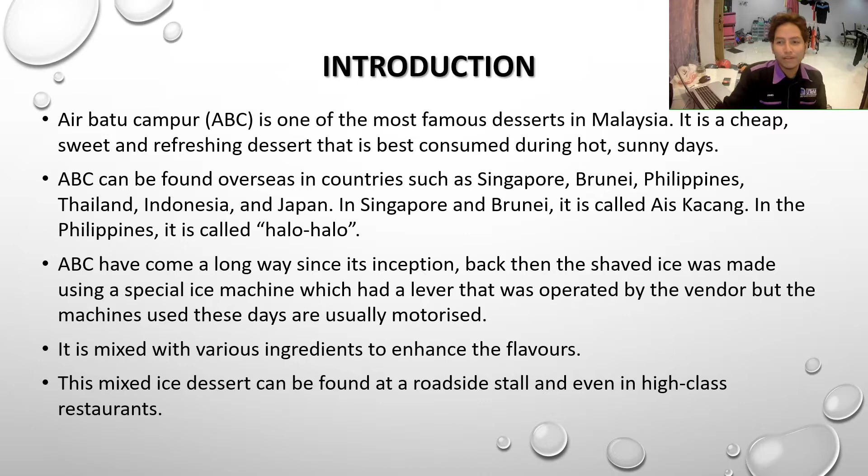ABC has come a long way since its inception. Back then, the shaved ice was made using a special ice machine which had a lever that was operated by the vendor, but the machines used these days are usually motorized.

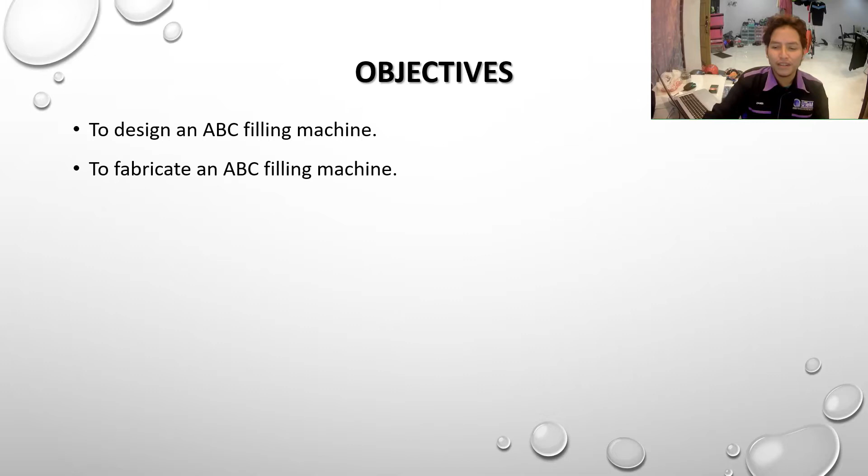For the objective of this project, it is to design an ABC filling machine and to fabricate an ABC filling machine. For the scope of study, first is to design the ABC filling machine using computer aided design, which is AutoCAD and also Inventor. The second is to fabricate the ABC filling machine using suitable materials such as stainless steel, food grade stainless steel 430. The last one is using a pneumatic system for the machine to work.

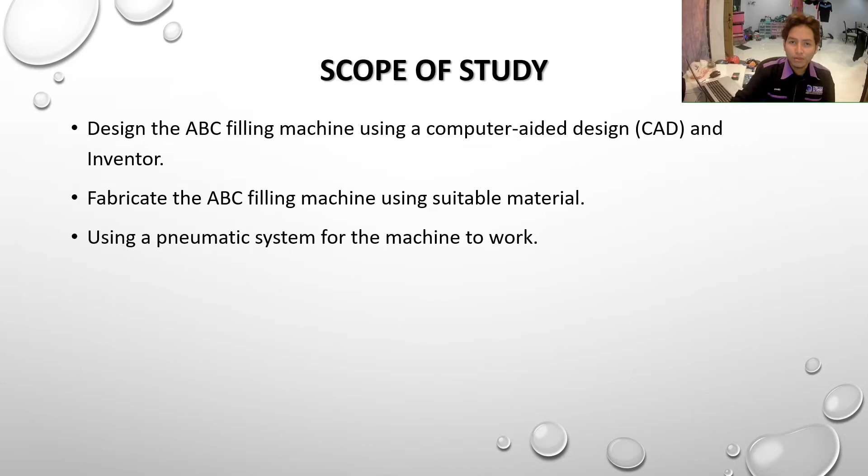For the problem statement, ABC has only been made by one person and this is done manually by hand. This slows down the task for the person to make one bowl of ABC because the person needs to crush the ice and then continue filling toppings.

The placement of the cans of ingredients and toppings near the ice crusher creates a mess for the process, and to fill the ice with the toppings the person needs to scoop up the toppings with a spoon, which can create a mess in the workplace.

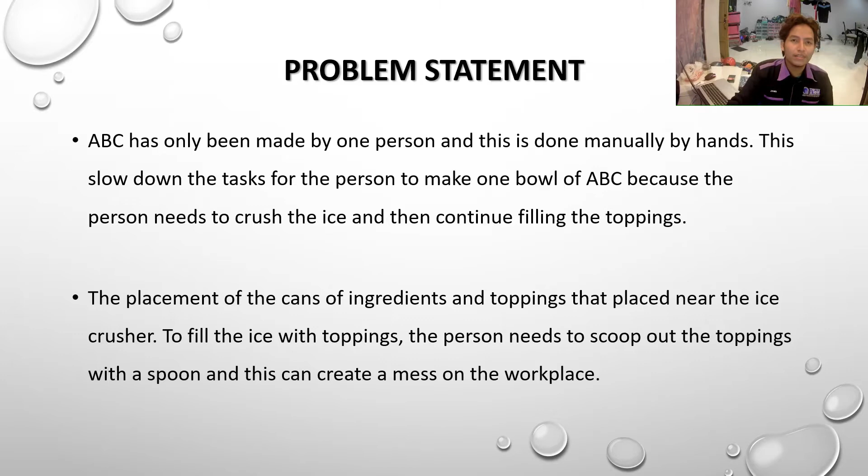For literature review, I'll tell you a little bit from Solanki and Raj 2020 on the topic of automated liquid filling machine. Its findings say that volume setting from one size to another will be done by changing command to the gear pump. Once it is calibrated, volume setting will be done in seconds, so it will give more production and save a lot of manpower.

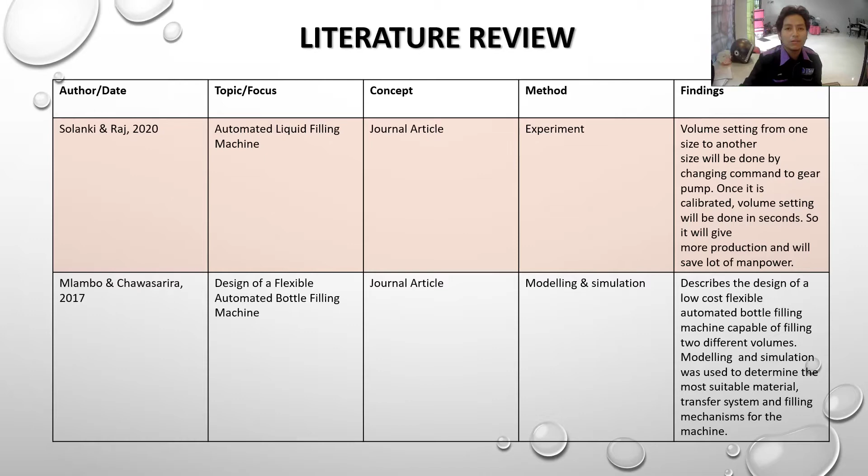From Mlambo and Chawasarira 2017 on the topic of design of a flexible automated bottle filling machine, they describe the design of a low-cost, flexible, automated bottle filling machine capable of filling two different volumes.

For this next slide, I compare three different types of machines: overflow filling machine, time gravity filling machine, and manual operation. The advantages are: fully automatic and accurate measurement for container filling for the overflow machine; economical and suitable for corrosive chemical filling for the time gravity filling machine; and low cost with no electric current involved for manual operation.

The disadvantages: the overflow filling machine has high cost and requires a big workspace. The time gravity filling machine requires fluid path and nozzle changes for different types of fluid, and is high cost. For manual operation, it may have inaccurate measurement and requires more workers to get the work done.

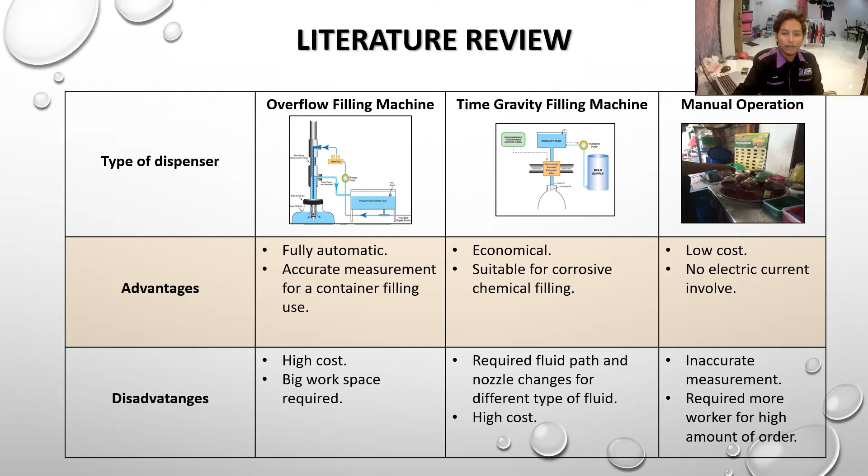For methodology, this is my flow chart for the process of the project. First is start, then briefing about the project in detail, which is meeting with my supervisor to get his opinion on this project. Then we move on to the project design, which is using AutoCAD or Inventor to generate the 3D and 2D diagrams, then go to mechanical and electrical parts, which is getting the parts for my project.

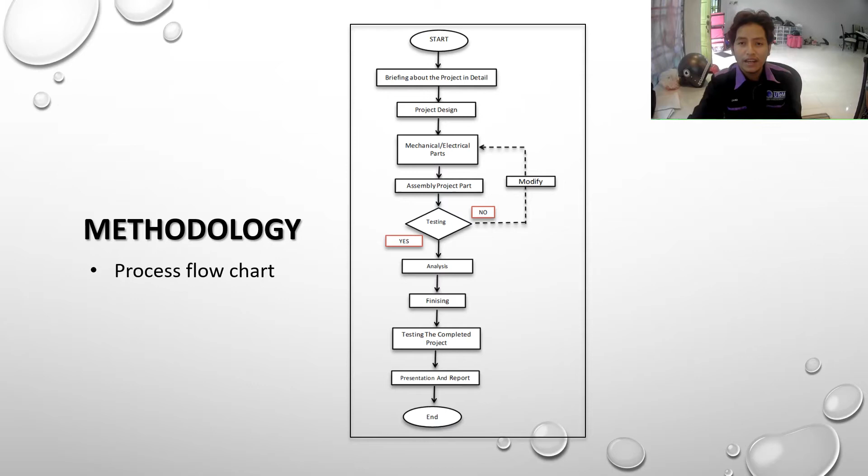Next is assembly of project parts, then testing. If the testing is a yes, then we continue to analysis, finishing testing the completed project, presentation and report, and then the end. If the testing is not working, then I have to modify back the mechanical and electrical parts and start from there.

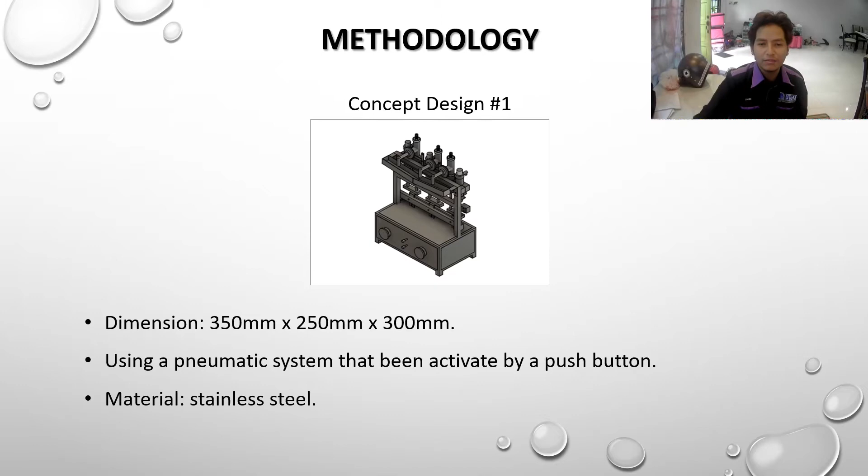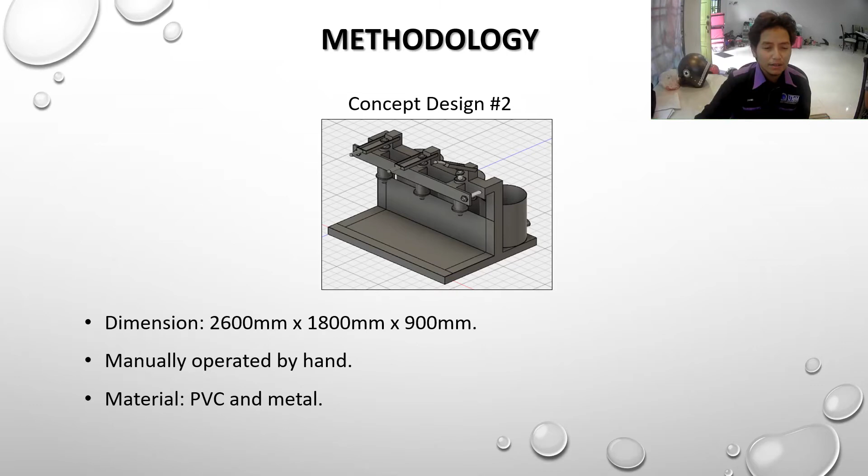The second concept design has dimensions of 2,600 by 1,800 by 900. It is manually operated by hand, and the material used for this concept design number 2 is PVC and metal.

For this, figure out the process of the conceptual machine. First one, the push button.

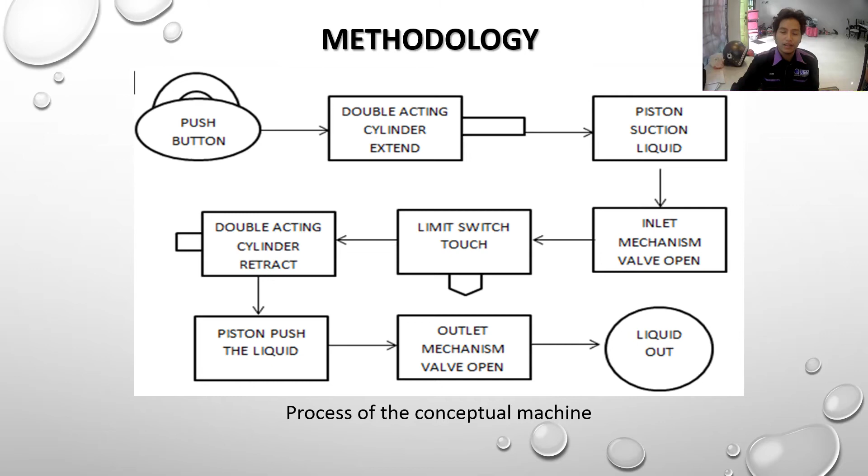When we push the push button, the double acting cylinder will extend, and the piston will suck the liquid from the container into the inlet mechanism, and the inlet mechanism valve opens through the limit switch touch. Then the other two double acting cylinders will retract, and the piston will push out the liquid into the outlet mechanism, the valve opens, and then the liquid will come out into the cup of the shaved ice.

And this is the conceptual project pneumatic circuit. This is the compressor. When the compressor gives out compressed air to the circuit, the push button will go to this mechanism valve.

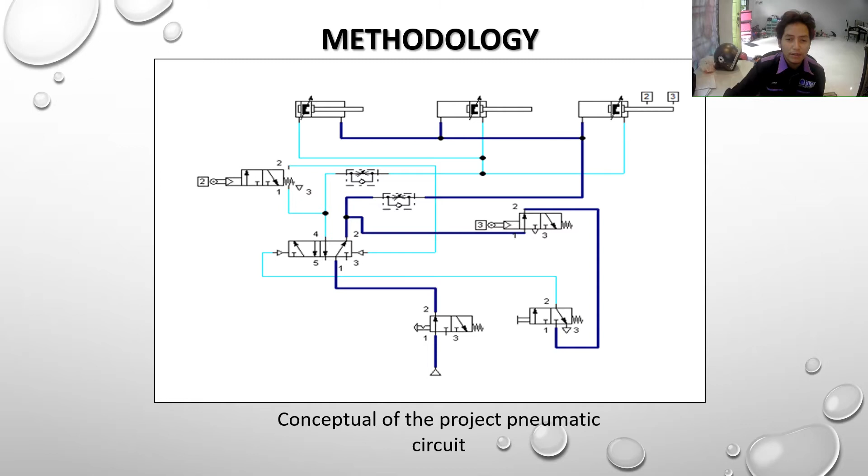This push button triggers two mechanism valves to touch with one of the double acting cylinders, and the other two double acting cylinders will retract, and it will continue over and over again until we stop the compressor's source of air.

And this is the result of the 3D design, which I used Inventor to generate this drawing.

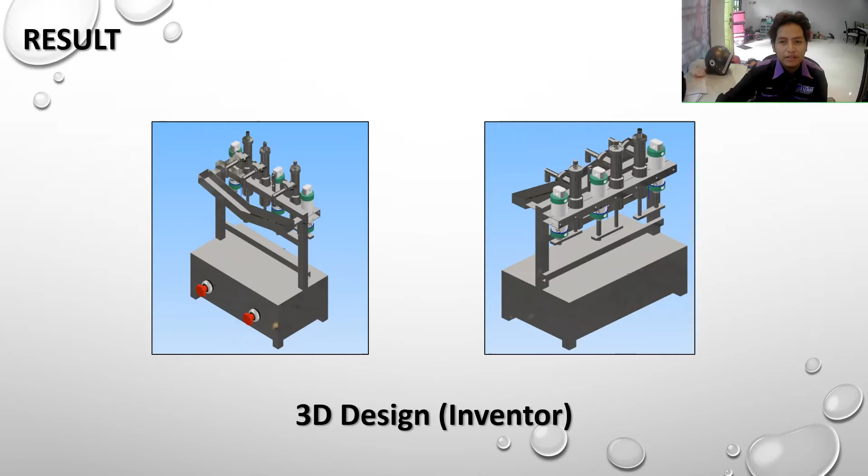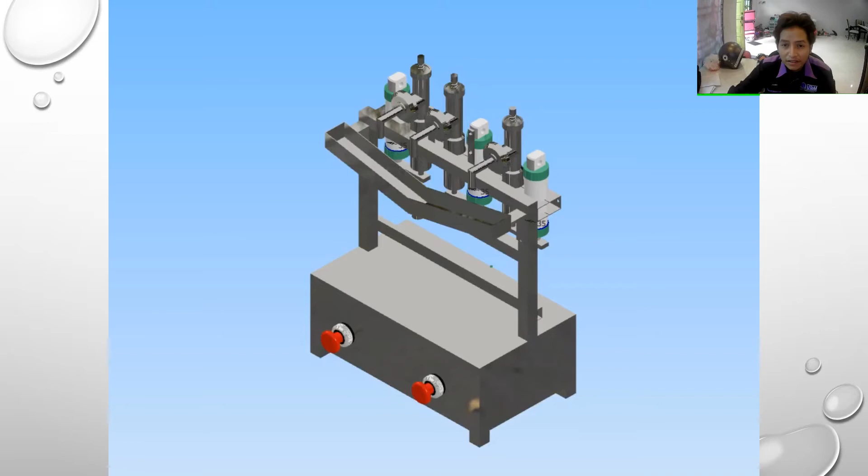And here is the flow of the process, the procedure. As you can see, as we push the push button, the cylinders will extend. Both two cylinders will extend, and one will retract, and it will go on and on until we stop the push.

And this is the video process of the ABC filling machine.

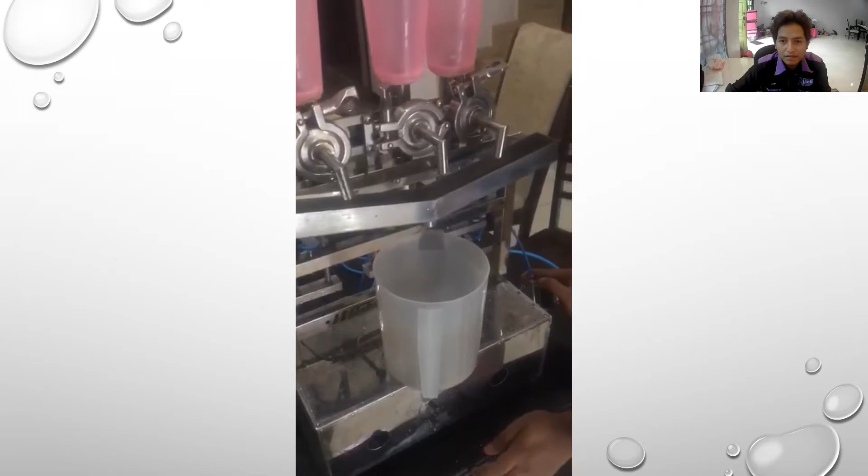As you can see here, when the cylinder is extended, it touches this mechanism valve, and then the mechanism valve will extend these two cylinders.

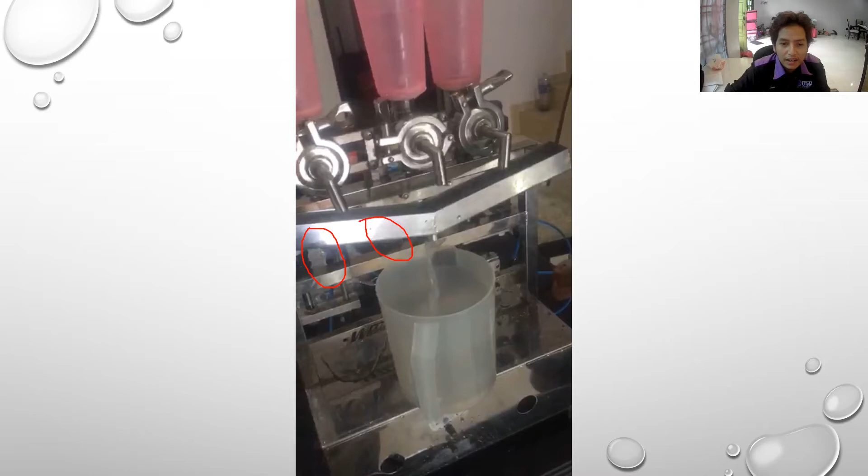Causing an automatic retraction for this cylinder to go up and touch back the mechanism valve over here, and it causes a flow of liquid filling into this filling tub.

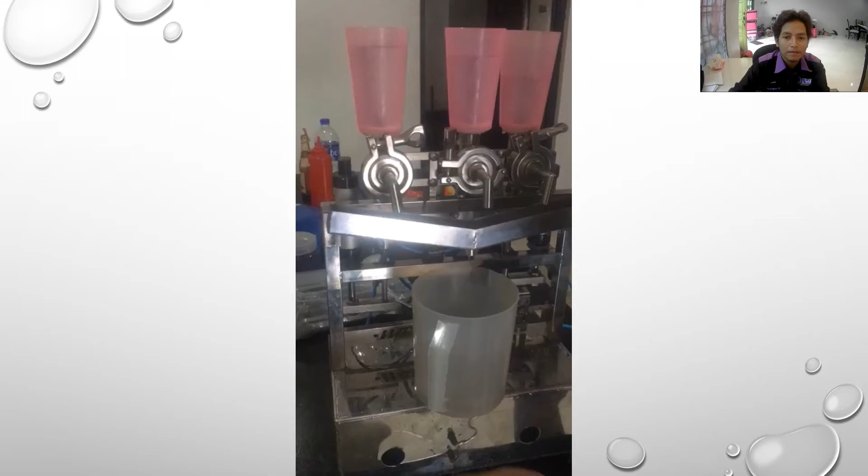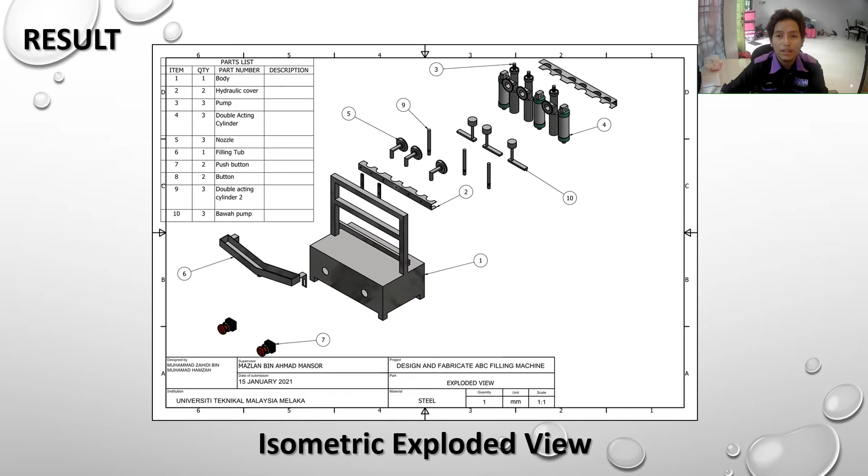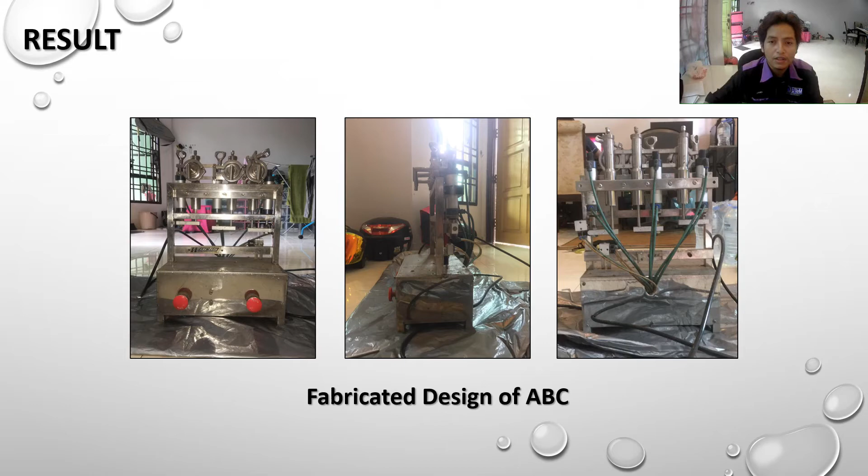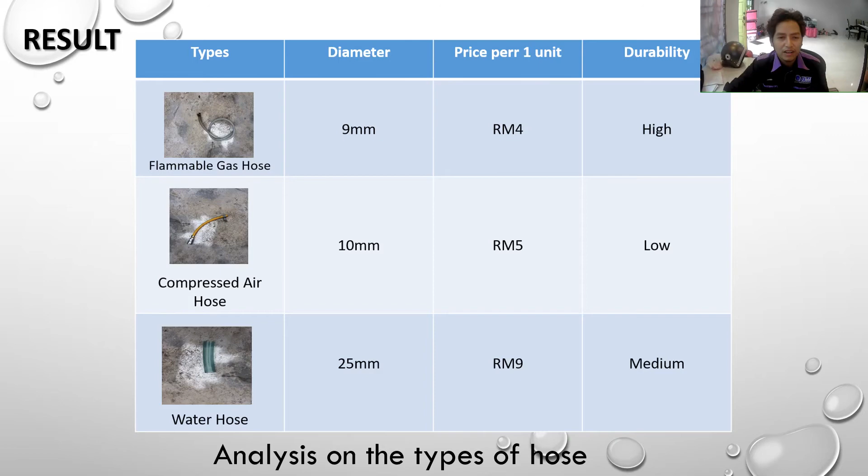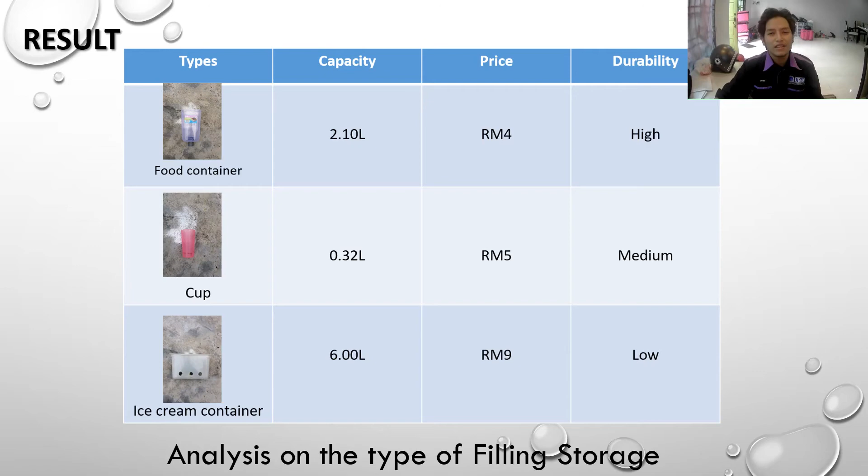For the analysis on the type of filling storage, I analyzed between three options: food container, cup, and ice cream container. Its capacity is 2.1 liters, 0.32 liters, and 6 liters respectively.

And these three have different durability also. For food container, it is high. For cup, it is medium. For ice cream container, it is low.

So I conclude that I can use these three different filling storages for different purposes. If I want to make it small and light, I can use this cup. If I want to use it for a longer event, I can use the food container. If I want an even longer event, I can use an ice cream container.

But mostly I will use the cup because this cup has been modified to fit the top of the suction pump.

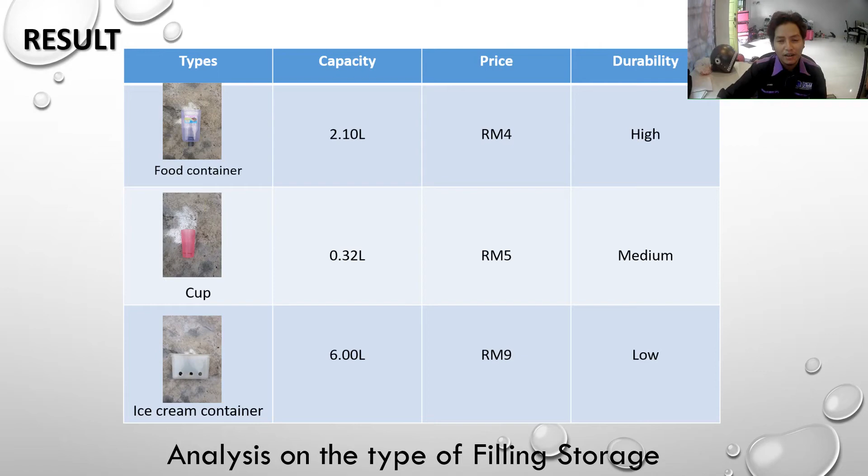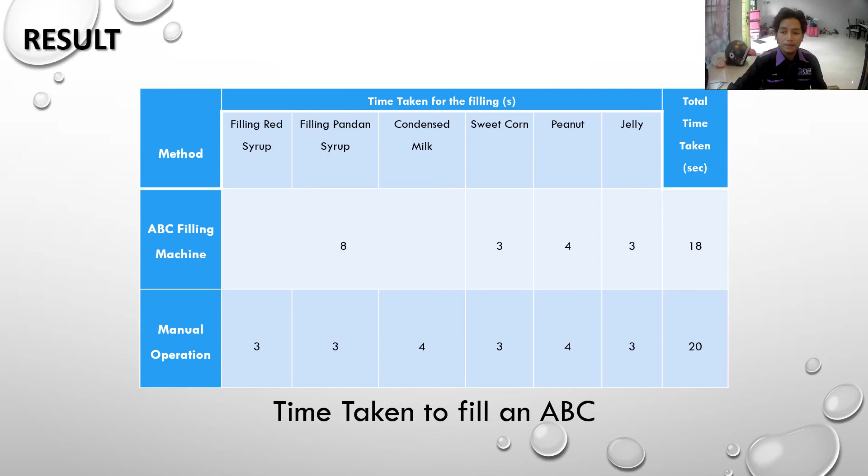For this, the volume of each filling: the scale is low, moderate, high, and the volume of filling is different, taking pandan syrup, red syrup, and condensed milk. For each different state, at low, the pandan syrup gets a volume of 3.33.

The red syrup gets 3.66, and condensed milk gets 13.33. For moderate, it is 10, 23.33, and 23.33 for condensed milk and red syrup, it is the same. And for high, it is 29.33, 33.66, and 38.66. This is the volume of each filling, that if the filling is put on top of the suction pump, it will get this volume.

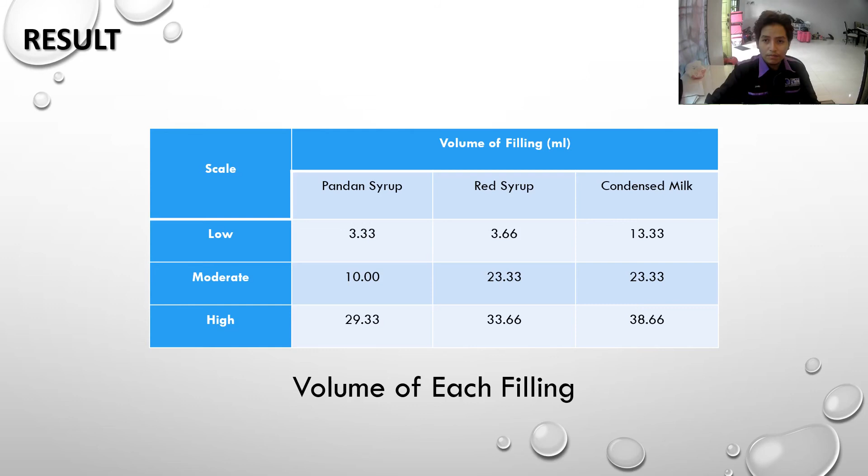For this slide, this is the estimated total cost for this project. For the components, I am using roller lever valve, double acting cylinder, pipe T with clamp, push button, 5/2 way directional control valve, stainless steel which is food grade, the tank which is the food container, the filling container, the hose, the screw, the oil seal, mechanism valve, and it totals 2301.06.

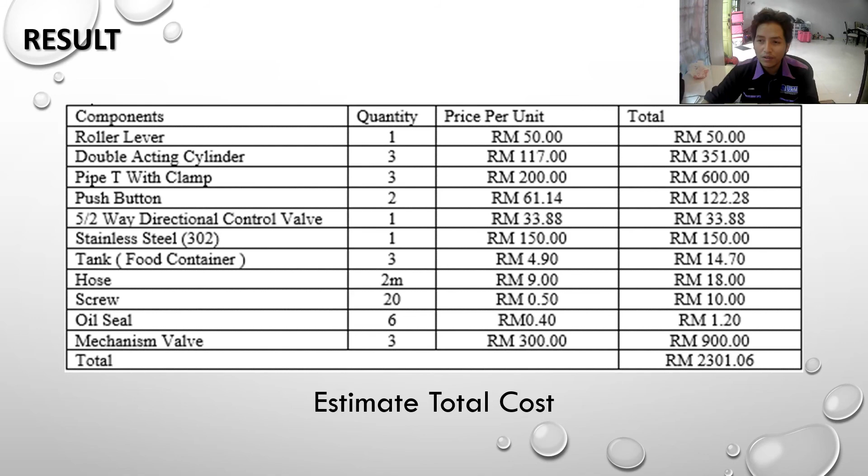For discussion, although many failings were identified during the process of making the machine, our objective for this project is successfully accomplished. Also, this project is successfully built within the scope of research as to narrow down the method to design and fabricate the machine. This helps to aim for the best result for future researchers.

Plus, it can help the trader to reduce work wage costs, as the economic situation at this time is in bad condition, such as this COVID-19 situation. Many workers lose their job, and then they had to start up their own business, and the price of the raw material to get is a little bit overpriced.

Apart from that, the filling is interchangeable with other filling, which can increase the use of this filling machine. This final project, we hope that it can be benefited completely, accepted and used, and suit the technological development in this age, and results from this project can be used by all consumers.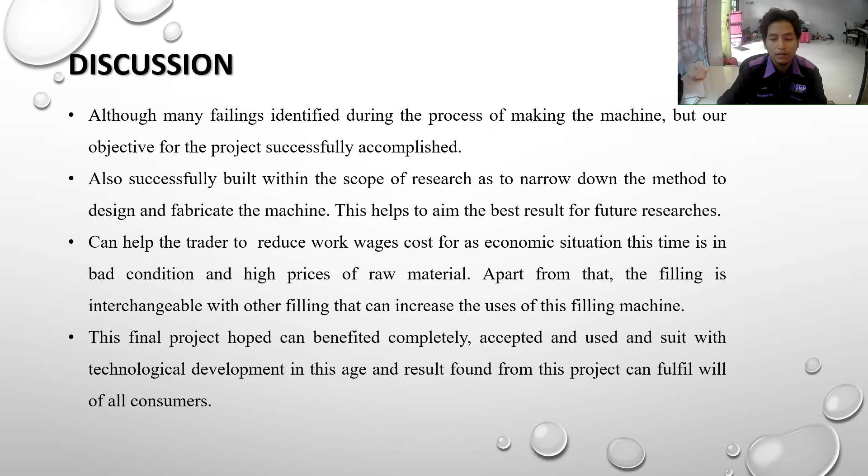In general sense, the process of filling using the pneumatic system was studied to make this ABC filling machine work. In this study, there are many ways of filling and many items were used as a medium of filling. This type of filling will be determined by the medium of filling and the scale of filling, such as industrial scale. Filling of sensitive medium also determines the type of filling.

As an example, the filling of an ice cream must be in controlled temperature. Besides that, in order to achieve the same result for future researchers or projects, a few changes can be made to reiterate different outcomes, such that it fits the needs of the consumer.

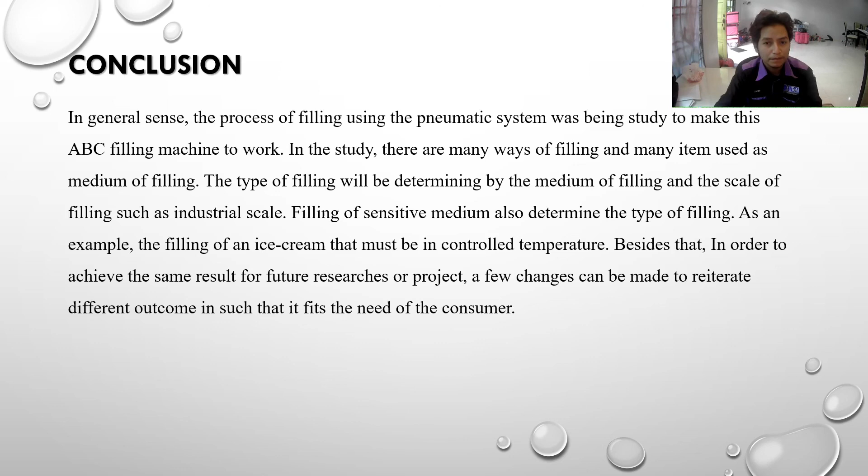For the recommendation of this project, the problem found is that the filling is not well spread on the shaved ice, and the solution is to place a rotating mechanism on the bottom of the shaved ice to rotate it, and use a conveyor to move the shaved ice along the filling tip.

The second problem we encountered is that it is hard to change the indicator volume of filling, and the solution to this problem is to create a lever for easier change of the indicator volume filling.

The third problem is the button has no label, and the solution is to make and attach a new label on the button. The fourth problem is that there is no instruction to operate, which makes it hard for new consumers to use, and the solution is to make a manual book on how to use and how to do maintenance on the machine.

And the last problem is a big splash of filling flow towards the top, and the solution for this problem is to add another flow control valve on the other cylinder to control the speed of the rod.